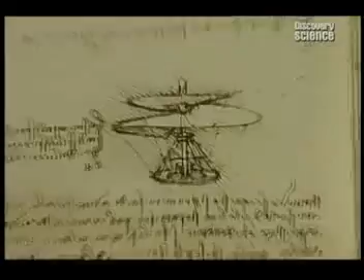The clues lie in the work of one of the greatest artists of all time, Leonardo da Vinci. He's left us thousands of scientific and engineering drawings showing plans for extraordinary machines: helicopters, tanks, submarines, massive war engines.

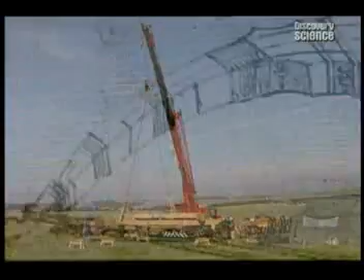We're going to build a war machine that Leonardo offered to the Duke of Milan. It was one he certainly planned to construct, but it's never been built. It's an 80-foot crossbow that fires cannonballs.

We'll also build Leonardo's ultimate dream, a flying machine. We'll construct it using traditional materials to understand the mind behind the machines. Was Leonardo an inspired engineer or just a prolific dreamer designing imaginary machines?

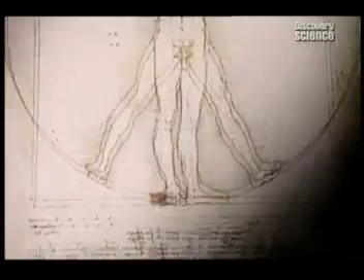He wants to push things to the boundary to see what can be achieved, and that can be an enigmatic smile, but it might also be the super gun of its period.

He wanted to remake nature, to make something in his own terms, which was like, almost godlike.

But for all his fascination with flight, none of Leonardo's flying machines were ever built. A problem for our builders is that over the years, Leonardo's work has been lost, vandalized, possibly deliberately destroyed.

We'll need experts who can trace and decipher the chaotic paper trail of his remaining archive. Our building teams will have 3 months to complete the 2 projects.

Success will raise the question, why weren't they built in his lifetime? Were Leonardo's ideas too dangerous for the world he lived in? By building these machines for the first time, we hope to find the answers.

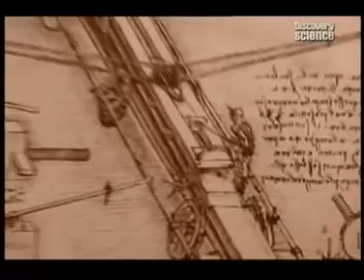In 1485, Leonardo wanted to impress the Duke of Milan, and he needed something colossal. The giant crossbow is 80 foot wide, 50 foot long, and takes 10 tons of force to pull back.

His blueprint will need translating into plans that 21st century craftsmen can understand. That's Ivan Williams' job. He's a design engineer with 20 years' experience making ancient weapons. But the scale and complexity of this machine is giving Ivan his biggest headache to date.

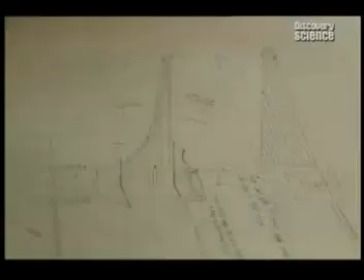I've got a lot of worries about the drawings that are there. I think maybe that's why it wasn't built, because the artisans that knew him would say to him, look, Leo, I know you're intrigued with this and the guy's paying a lot of money, but really, you'll screw yourself. If you make this, you'll make a prat of yourself, because it won't work very well.

But the builders have to make it work, and that could be dangerous. We're putting a huge amount of force into that bow. We wind this thing back, we get it up to 6.5 tons, something fails catastrophically, and it just throws bits of wood and metal all over the place.

So, not injuring people is of prime importance with this. The second prime importance is that it throws a large rock a long distance.

For now, the woodyard stands idle. The team can't start until the design issues are resolved. They've had to call in an expert from Florence, famous for his work on the artist-engineers of the Renaissance. He's Paolo Galluzzi.

Director of the Science Museum in Florence, Paolo is a world authority on building Leonardo's machines. He knows the problems facing the team.

This is the fantastic world of Leonardo. You have to look for hints and form a glimpse of the development of the idea in the Leonardo mind. He's a visionary. He's never simply accepting ordinary solutions. He wants to improve, and sometimes this is the weak point of his ideas. He wants to improve at any cost, even if he's raising or risking to enter the world of impossibility.

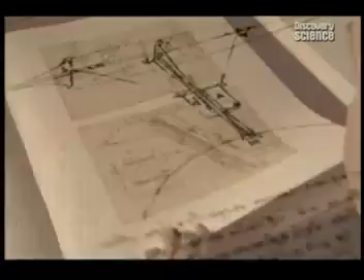Has Leonardo entered the world of impossibility with his giant crossbow, or is Ivan being too cautious?

Paolo is joining the team in Wiltshire to help resolve their differences. Dave Hepworth, team leader, will chair the meeting, but Ivan has set the agenda.

Well, let's see. I might sound very negative with some of the things I'm about to say, but looking at all the problems that will occur, if you list them down, there are many. The trigger mechanism, in my opinion, in this application, won't work.

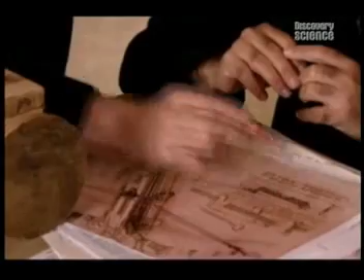Pressure on that nut would just rip straight out as it is. The whole thing was smashed. And there's no need for that, because wooden trigger mechanisms at the time were designed for this particular type of machine. As a watchdog of Leonardo's documents, I'm playing this role today. I would say that I would be pretty hesitant to abandon this trigger mechanism.

As he says in a letter to the Duke of Milan offering his services, I will make machines out of the tradition. This is typical of Leonardo, introducing innovation. But there were trigger mechanisms around that he would have seen, and I'm sure the armorers would have said to him, let's go for the one the Romans used, proved dead simple, holds the string completely, you can't pop over the top.

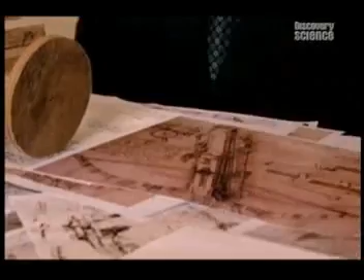And how do you interpret these designs? I'll try to copy it in a similar sort of way, but that's the weak point, that's where the bow will start to crack.

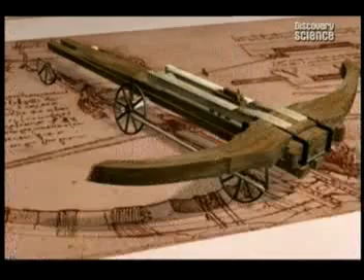Paolo's reluctantly agreed to Ivan's replacement trigger, but the builders are pressing for two more changes. Because they're convinced Leonardo's bow will crack under tension, they want to slim it down to make it more flexible. Secondly, they insist the size of the entire crossbow is inefficient. Dave's computer model suggests it will work just as well 30 feet shorter.

Paolo accepts Renaissance builders may have made the same adjustments, but he won't permit any further changes. Paolo's really keen that we follow the original Leonardo design. But I think it's ridiculously huge. I mean, come on, 80 feet is silly. We've got to go for something more like 50 feet.

But I'm sure that is exactly how it would have worked in Leonardo's day. They would have gone along, they would have changed things as they made it, and that is exactly what we need to do. We need to make this a learning experience, not just follow this design and build it exactly as it is. Yeah, it was an experiment. That's what we're doing. We're doing an experiment. And I think it's still in the spirit of the Leonardo project.

Team leader Dave Hepworth is a structural engineer and expert bowmaker. Dave claims that at 50 feet, this machine will still be 5 times bigger than any crossbow ever built. It's truly a giant, designed for a giant: Ludovico Sforza, the warlord of Milan.

Leonardo was his court engineer and lived in Sforza's palaces. He'd come a long way from his humble beginnings.

Our second project is to make Leonardo's dream of flight come true. Steve Roberts and Martin Kim have that job. They're world famous for recreating the milestone machines of aviation history, but their knowledge will be of little use when attempting to build a machine that predates flight by 400 years.

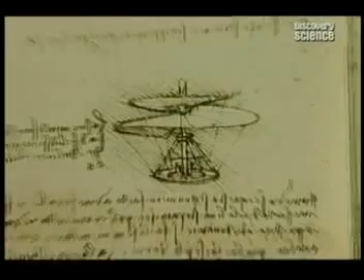They begin by eliminating the impossible. Many of Leonardo's early designs are weird man-powered machines which can't be made to fly. In his later work, based on his studies of birds, Leonardo moved on to gliding flight. While searching through these designs, Steve and Martin notice a wing shape that Leonardo draws time and again.

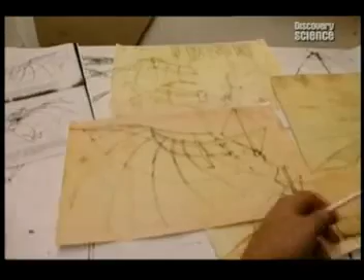This is nice, but the only trouble is, if we go down that road, I think it's not going to be very stable. Well, this is a better shape, I suppose. But even that, I think you're still going to need a tail. Do you think so, for something that's so flat? Well, there's a tail here which is in his other drawing, really. As long as Leonardo's ideas and concepts are there, I think it would be fair to do. So we'll go with this one, we can take the tail off of that. Yeah, that's agreed then — if we go for a tail, and that shape as well.

Oh, well, thank you very much. That's an absolute pleasure.

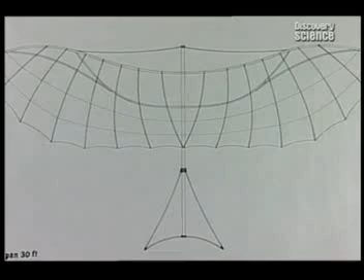Steve and Martin plan to build this. It combines the tail from one Leonardo drawing with the most common wing shape among his designs. I think we'll have to make another one — go into production, I think. They're building a scale model that relies entirely on the wooden frame and spars for rigidity. It'll be quite a spectacular joint, isn't it? There are no bracing cables for support, and it's exactly what Leonardo drew.

The model has a 5-foot wingspan, while the full-scale glider will be 30 foot. Unlike the crossbow team, Steve and Martin are not going to deviate from this 500-year-old design, even though they're not sure if it'll fly. It might be worth a trip to Old Warden down the grass, with its nice gentle slopes.

The first attempt isn't bad, but perhaps the glider is too heavy. They've made it from linen, cane and poplar. The hope is Leonardo could have used a lighter wood, like Steve's favourite, spruce. There's only one way to find out.

Steve will go to Florence to hunt for Renaissance materials, and Dave Hepworth is going with him.

There's not much point testing a miniature giant crossbow. Only the full-scale machine can reveal how the parts will stand up to the colossal stresses, but at least the trigger works well.

Now both teams have to find authentic materials that are right for the job. It's essential if Dave and Steve are to build machines that, for the last 500 years, have only ever existed on paper.

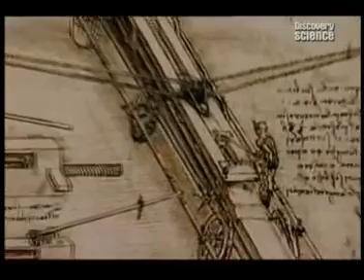Our builders have to bring two of Leonardo's grandest designs to life, but they must use traditional materials. Florence still has workshops practicing the technology of Leonardo's day. Paolo has brought Steve and Dave to meet Fabio Rossi, a specialist in the restoration of Renaissance timbers.

Yeah, we've got some specific questions about wood that we need answering. On one side of the bow we need a hard wood that can stand compression.

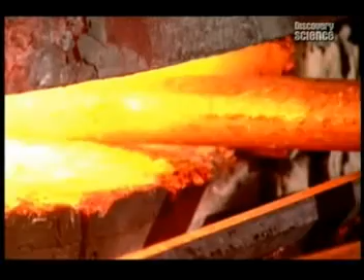While Dave and Steve are in Florence, Ivan's been cracking on with the metalwork for the giant crossbow, and he hasn't found any problems with the nuts and bolts yet. In Telford, they'll forge the trigger mechanism and the brackets holding the giant wooden structure together. It will need 10 tons of iron.

With research and development now complete, the crossbow team have 9 weeks to build their machine. And with the metalwork underway, they have a head start over the glider team.

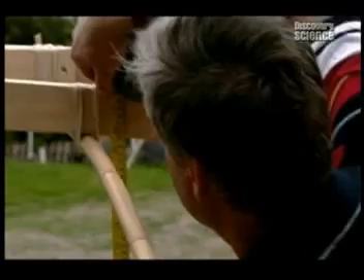Steve and Martin are still running tests. They're simulating air pressure on the wing with sandbags. They've taken Fabio's advice and are using black poplar for the frame. The spruce Steve wanted wasn't known to Leonardo.

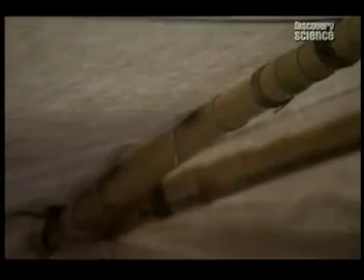Leather will bind the wing ribs, which are made of cane. The glider has to be as light as possible, and it is, weighing in at 70 pounds. But the linen for the wing will add another 10. To weatherproof the linen, they're trying out some Renaissance recipes.

Yeah, great. Two seaweeds, shellac, starch. Starch. Yeah, I like the shellac because I think it's a form of varnish, and they... Yeah, I've got a problem with that though. What's your problem with that? It's just the colour, really.

Now that they've started building, Steve and Martin have a better chance of assessing the flight potential of Leonardo's glider, and they're not seeing eye to eye.

If it flies wonderfully, that would do just fine. You can look at it and say Leonardo would have flown years ago if he'd put his mind to it. And to be quite honest, I think he'd have run out of money trying before it worked. Because I think he'd have crashed a lot of gliders before he got one that actually worked.

Realistically, if it produces lift, controllable, leaves the ground safely and comes back down to the ground, I shall be absolutely elated. But I would love to see it go that extra bit, actually, just a bit more. Steve is clearly the more optimistic of the two of us, and he gets very excited and very carried away, and he tends to promise the Earth. We'll see if we can deliver that.

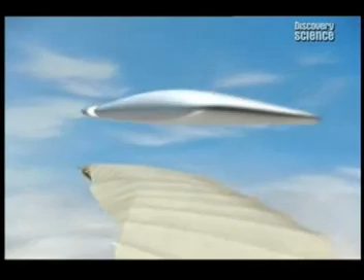Steve and Martin are concerned because Leonardo's wing lacks an aerofoil shape. The leading edge found in modern aircraft divides airflow around the wing in a way that reduces pressure over the top surface, and this is what produces lift. Without this leading edge, Leonardo's wing may never get off the ground.

The sheer scale of the crossbow project means their problems are mostly structural. The carriage is 45 foot long and weighs 10 tons.

For the bow limb, Dave's decided to combine elm with hickory. He's taken a small liberty, because hickory was only available 60 years after Leonardo's death. However, it is a traditional wood for making bows. But the team are puzzled.

Why was an artist designing a weapon of war in the first place? We know him as an artist, but obviously he's also a scientist, and he's really interested in the latest technology. For much of this period, the latest technology is weapons, methods of warfare that have never been used before, or perhaps adaptations of older methods of warfare that only he can see the potential of.

This is the great enigma. Why did Leonardo, a man famous for innovation, base his design on an ancient weapon, the crossbow, when the weapon of choice was the cannon?

Leonardo knew that gunpowder was highly unstable and often killed the gunners. Cannon couldn't be relied upon for range or accuracy because of the problem of recoil. After each firing, it had to be repositioned and re-aimed. Could the giant crossbow actually have been a better weapon?

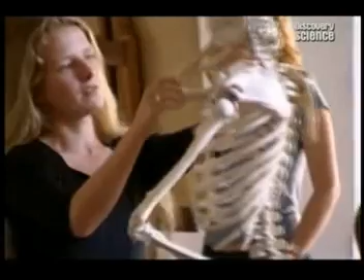Leonardo is looking at the body as an artist and as an engineer. Other artists were really concerned with the surface structure. Leonardo takes it much further. He's interested in anatomy as a subject in itself, and in the engineering of the body.

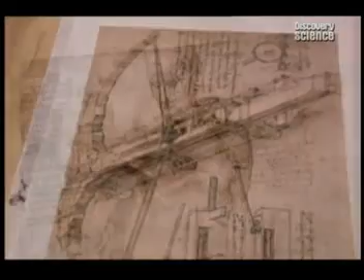So, for example, in his construction of the magnificent crossbow, we see a direct relationship between the tension of the wood and the tension of bone. It is covered almost quite literally with muscles and sinews that operate that invention.

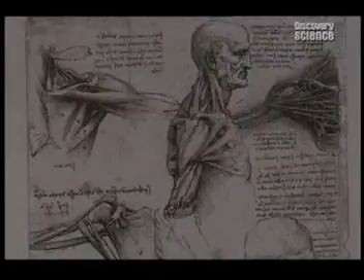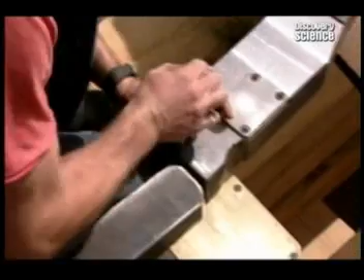It's human anatomy that inspired the giant crossbow, but a simple human error has put the project in jeopardy. Amazingly, Ivan's plans are in feet and inches, but some components have been ordered by the meter. Things don't fit, and tempers are starting to fray.

These big bolts here, they're just slightly too short, and the metal axle support's slightly too long. I think they're the right length. I think the axle is too small. Well, OK, right, there's a bit of an issue there then.

Well, I did that originally at a foot, and I really think it needs a foot. OK, in terms of what? Just the weight of this. There's no way that steel would have to bend for the wood to fracture. There's no way that's going to happen.

OK, and you were sort of worried about how this has come about, and I think there are some discrepancies or whatever, we're working to inches and millimetres. Well, the problem is these drawings have been done at different times, and they haven't necessarily all come together.

The prod is the critical part of this, the bow limbs that stick out at the front. Right, the bits that are doing all the bending. If they don't store the energy well enough, or if they split, or the laminations fail, then it's not going to work.

The bow limb is laminated, meaning it's two woods glued together. The elm can stand greater compression, and the hickory has good elastic properties. This combination should compensate for the power lost in slimming down Leonardo's original design. They knew about laminations in Leonardo's day, but creating a strong bond between the layers of wood is a complex process. It's causing big headaches.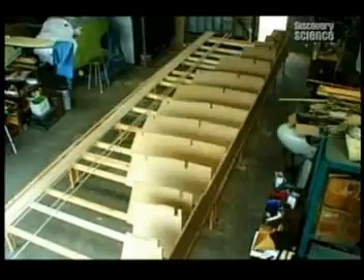For the glider, precision is vital. Steve and Martin are individually responsible for thousands of parts, and these must fit together exactly if the machine is to fly. But there's a crucial component on the way that they haven't yet got the measure of, because up till now, no suitable pilot's been found who'll risk their neck flying this glider.

Judy Leden has agreed to be our pilot. She's three times world hang gliding champion, but it'll still be eight weeks before there's a glider for her to fly.

Judy's flying into the construction yard to meet Steve and Martin for the first time. Now they'll have to deal with the human element of this project, the risks facing Judy in her most dangerous challenge to date.

Feels like it wants to fly, doesn't it? Yeah, in this breeze that's blowing up now, you can feel the strain on it. Hear it, actually, it's creaking.

The things that disturb me are when the nose comes up and it stalls, it just automatically seems to nose dive, which the thought of that is a bit uncomfortable to me, obviously. I think the trouble we've got is actually trying to find where to actually hang you, so you have got that control the first time up.

The old hang glider had very tiny A-frames, very small. It's all well and good to say use an A-frame, but we haven't got any evidence of an A-frame. What have we got evidence of? Very little. Absolutely nothing. No, we've got very little, but there is good evidence of a harness being attached here, but this is the point you would like to be hung from.

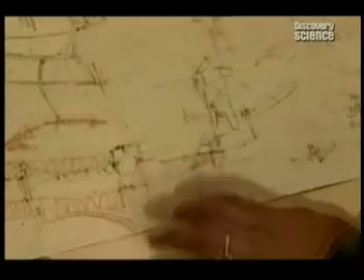I'm not bothered about harness comfort, but if I'm to commit my neck underneath it, I'd like some control. As a modern hang glider? The only form that I know is weight shift. If we hang just an A-frame straight onto this now, then people are going to say that you've just built a hang glider. Up until now, we've built a Leonardo. I need control, that's fundamental to me.

You've got to have control, Steve. If you don't have control, then you're going to hurt someone badly. I'm not saying not to have control. I'm just saying to go to a modern hang glider concept is probably premature. So what are you going to put on there? I don't honestly know.

In 1482, Leonardo moved to Milan to further his ambitions. Aged 30, he found the city every bit the rival to Florence. Ludovico Sforza, the Duke of Milan, was attracting the most talented artists, engineers and thinkers of the time to his court. Lots of scholars were moving to Milan, and Leonardo found a fantastic companion there, Luca Pacioli, a great mathematician who introduced Leonardo to Euclid.

Leonardo didn't know anything about geometry when he moved to Milan, and Luca Pacioli and other scholars, Marcantonio della Torre for anatomy, Giorgio Valla for classical knowledge, were very important for him during his Milan stay.

In Milan, Leonardo began to study, began to write, began to change his idea of the artist, and more and more he was involved in theoretical discussions, for example. But this wasn't the theory Leonardo knew from his time in Florence.

What he came up with was really remarkable, miraculous in many ways. But what he came up with was also blasphemous. He believed that scientific observation, not religious dogma, should dictate how the world was interpreted. Leonardo had taken a heretical and dangerous path.

His studies were leading him to a startling conclusion: that God's divine creation, man, was a machine, and like all machines, capable of improvement.

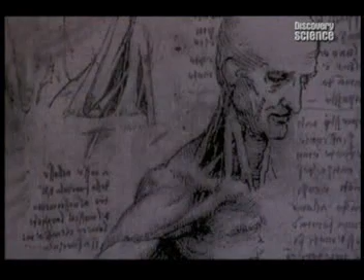Our team are convinced that Leonardo's design is also capable of improvement, and after two and a half months of arduous work, it's time to see if they're right.

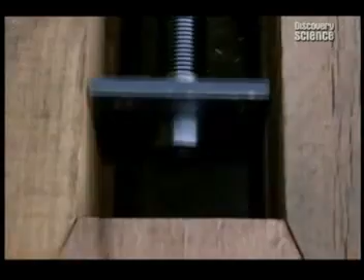The big test will be to see how the bow limbs stand up under pressure. These are the muscles and tendons of the machine, the most critical components of all.

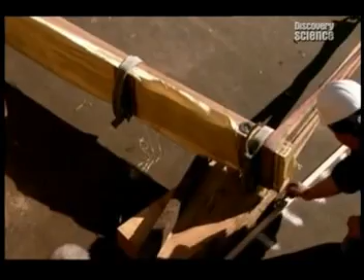Tell me when we got to where we got to before. Hang on just a second, let me mark it. This is the make or break moment for the laminates that have taken over a month to prepare. Now you're halfway on the silver mark. A little bit more. Whoa, whoa, whoa, whoa, whoa, whoa.

It's nothing short of a disaster. Could a 15th century design have defeated 21st century know-how? I think this laminate is opening up, and I think some of these glue lines might be going.

The worst thing possible has happened. And I just know that when we bend it, those cracks are going to get worse and the things are going to snap. Oh, it's really, really frustrating because I know we could do this thing. I know we can make it. But it's just that we haven't got the skills. We've lost those skills that they had in those days to be able to build these damn things. And we just, it's really frustrating because we're almost in grasping distance and it's slipping out of our grasp because we can't build it as well as we need to make this thing work. That is outrageous. I mean, that is just utterly useless.

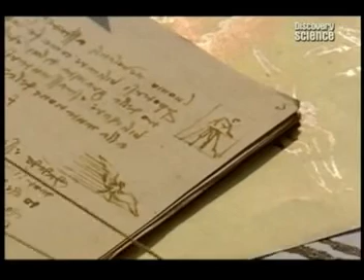This tiny sketch is ingenious. It shows that Leonardo understood the principles of modern hang gliding control. Shifting the pilot's weight alters the direction of the glider. That's been very, very encouraging. It's absolutely terrific, because one of the things Leonardo is trying to do is to invent something like nature. Not to look literally like a bird, but to have the feeling of a natural design. And that does that absolutely terrifically.

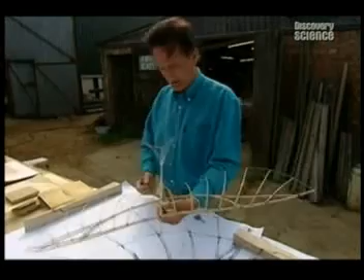I think it's great. I mean, this in a way is the Mona Lisa of engineering. This is terrifically exciting. So we're in a sense doing the Mona Lisa of engineering. Well, it is good. I'm glad you're quite pleased so far. It's encouraging anyway. It's good for us.

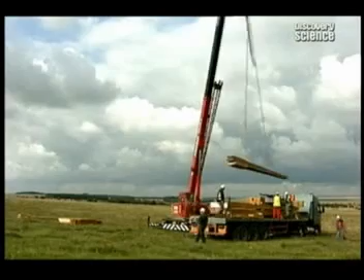The giant crossbow is finally leaving its Wiltshire home. It's taken nearly 11 weeks to build, and the team are confident that everything fits together perfectly. Arriving at the test site, there is one nagging worry. They haven't had time to test the new bow limbs salvaged from what was left of the hickory. They only just managed to finish them in 2 weeks.

The Army used Salisbury Plain to test their big guns. It's the ideal place for the field trials of Leonardo's supergun. Dwarfing 21st century artillery, the giant crossbow requires a lot of manpower to prepare for firing. You know, it's taking wood to its absolute limits. Look at the size of those things.

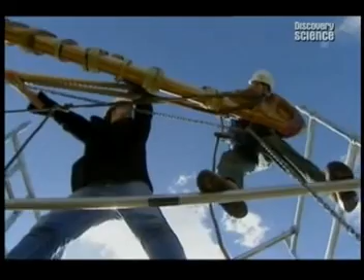It's just amazing, the forces in it, and I think it just shows the sort of ambition that Leonardo had. He was obsessed with taking things to the extreme, and you can't get any more extreme than that. He must have been nuts, actually.

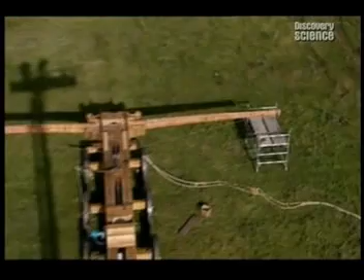Paolo Galluzzi has arrived from Florence for the big moment, but neither he nor the Army are allowed within 40 yards of this monster because, when fully drawn, it could explode. A motor has to do the job of drawing back the bow. It's an awesome sight that's even impressed the top brass.

It's the size of it that is just, it does take your breath away. Well, I think they were hoping that you just wheeled it out and the enemy all ran away. If there was a pile of pikemen coming at you and they saw this, they might well think twice. They would probably say, no, had enough of that. Yeah, I mean, that's part of it, the fear factor.

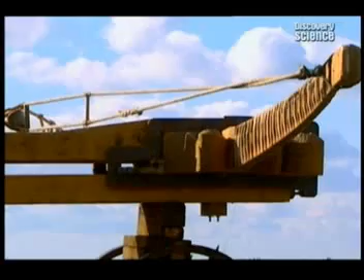Okay, take the strain gently. Dave has a microphone attached to the bow, and he's listening for the sound he fears most of all: cracking wood.

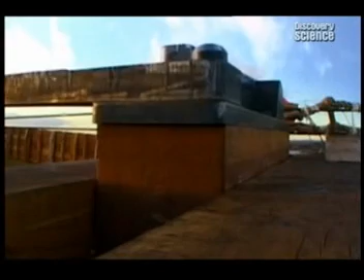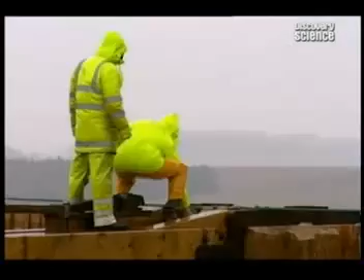It's not long before spirits are sinking under a relentless downpour. The problem is that the sling is failing to release the ball cleanly when it reaches the end of the launch ramp. Reviewing their last disaster, the team seem to think they've found a solution.

The ramp is actually looking good. Yeah, but we've got to then stop the pouch and the ropes before the ball is dispatched. We've got to stop them before they clash into this and waste half of their energy on the bow itself. The way they're going to solve the problem is by fixing two upright posts in front of the ramp so that the sling stops dead and flings the ball forward. But the rain and the failing light are threatening to stop play.

Like some form of torture, this, isn't it?

Leonardo's war machine failed to fire the ball past 50 yards, and the rope, sodden with rain, lost its tension. There's time for one last go, but it is disappointing. I mean, the thing, just look at it.

It is a monster, isn't it? And a flipping scary monster all the time. I've been shaking in my boots. I might not have been showing it, but I've been absolutely scared witless drawing that thing back, because I know in my mind the forces are horrendous. They're massive forces. Getting those limbs back, we thought they were going to break halfway down. They didn't. The whole thing held together.

One of the last to leave the site is the man who warned the team about tampering with Leonardo's design, Paolo Galluzzi. We would always dream of having Leonardo himself give a look at what we did and say, rubbish, I would have done much better. But we are prepared to follow the process until the end, as in an adventure, a real adventure.

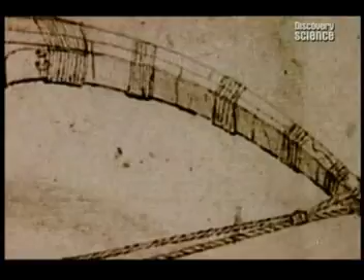But the drawing board has to be Leonardo, because we're getting too far away from Leonardo's design, I think. I'm just trying to think back how we got to this point. I think what's happened is we were too confident at the beginning, because we looked at Leonardo's drawing and said, nope, this won't work, we could build it a lot better than that. We went down that route and now we've found we were wrong. We can't build it better, because we've got too complicated again, and we've been too much influenced by current engineering theory.